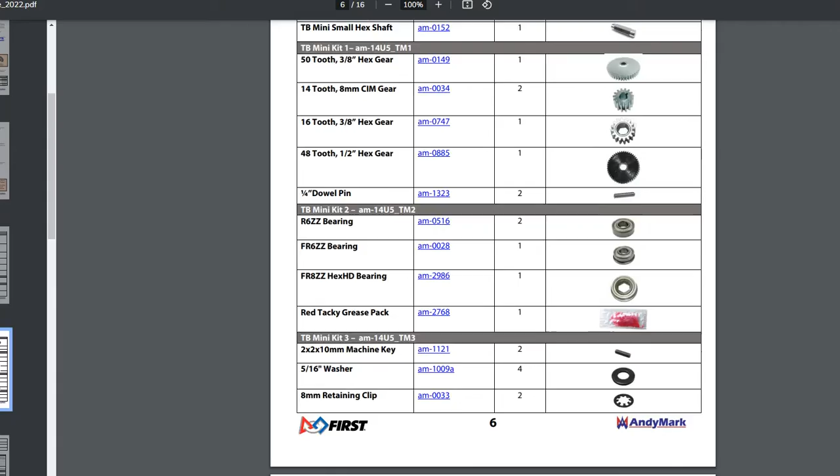A lot of these kits give you a nice layout of everything that's in the kit, quantities, sizes, and eventually CAD files, which are STEP files - we call them STEP for short - and then the drawings that go through it. What I did is I opened up this user guide in another tab, so we're going to switch over to that. This is the starting guide that everybody's going to have to read carefully as we build this.

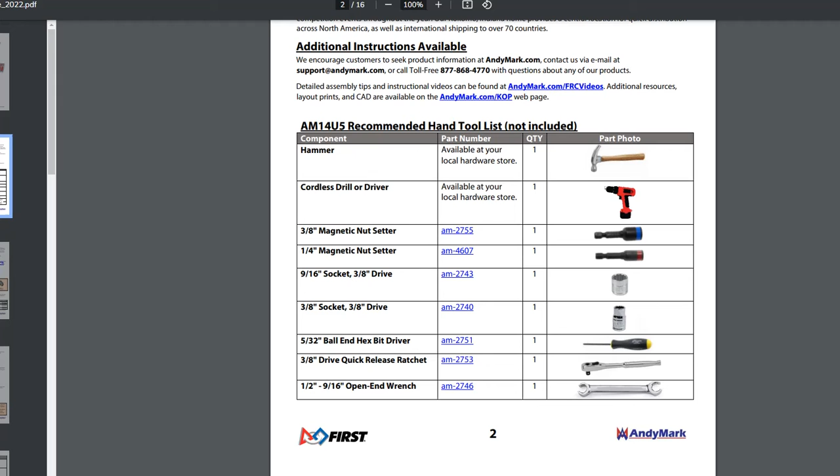It shouldn't really take very long. If you're really cooking and going through every step quickly, it's probably an hour or two to knock this one out. But since a lot of you have never done this before, most people will take a bit longer.

So the first thing to note is the gearbox in the kit is what they call the Toughbox Mini gearbox. This is a pretty standard kit - there's only like 3 gears in them and a hex shaft, and this mounts directly to the frame. Oh, we got another person coming in.

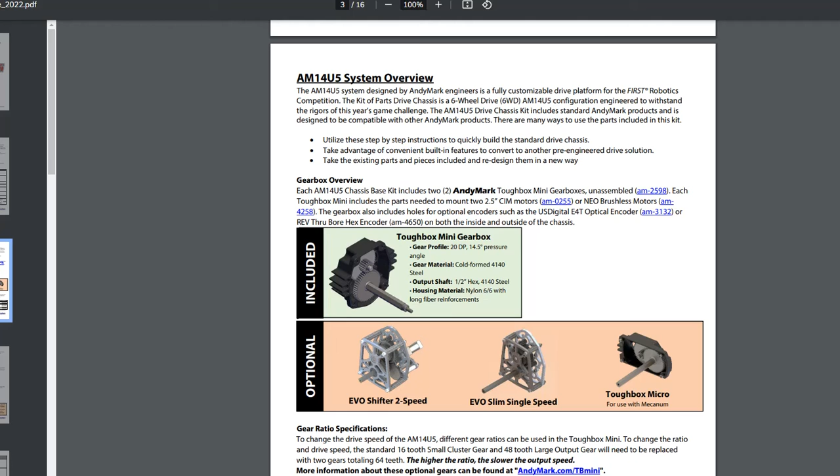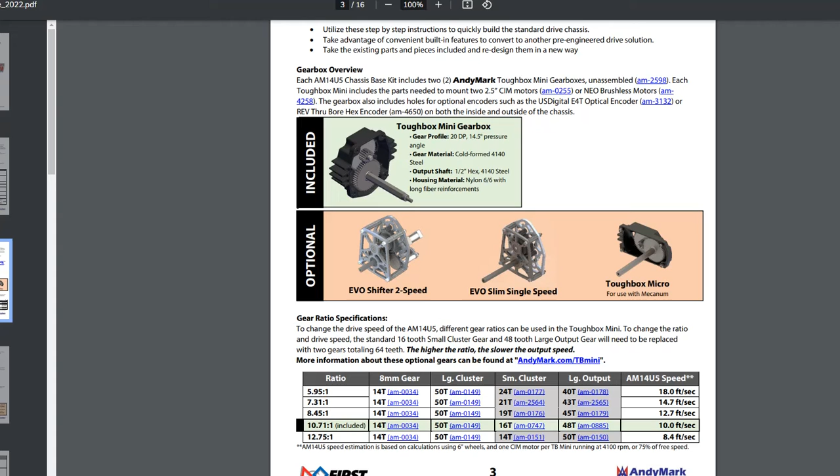Once you use this default gearbox, there are a few other optional gearboxes we could also use that have things like shifting, so 2-speed, and other smaller gearboxes, but a lot of these we don't have. You have to order them separately, but the standard kit is always going to come with the Toughbox Mini, so that's a pretty important setup.

Ratios are important because this tells you how fast things are going to go. The included ratio with this collection of gears, shown in green, is going to get the robot going close to 10 feet per second, assuming a 6-inch wheel. If you went to a 4-inch wheel, you're obviously going to go slower, and you might need a different setup. We do have a variety of gears that could give different configurations, but it's probably best to just do the standard kit ratio for now.

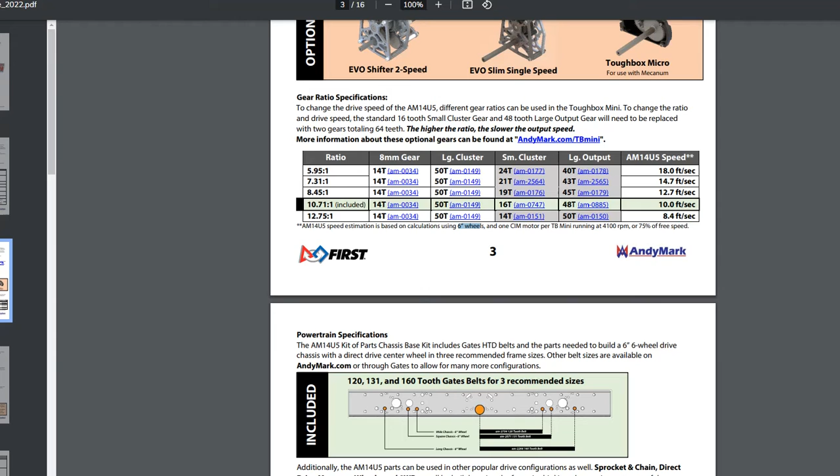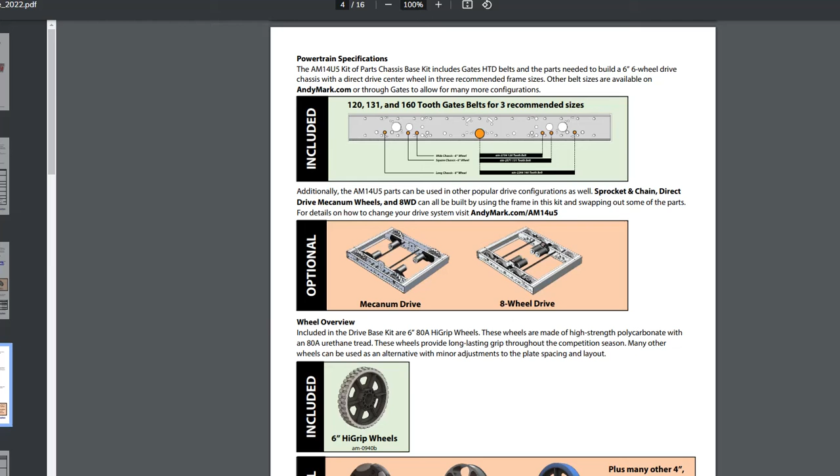Any other big items? These kit rails have a lot of different holes, and it can get real confusing when you start looking at what holes go where - where do I put the drive shaft? They're built for a lot of different configurations, and they'll show you a few different types. An 8-wheel drive configuration is pretty unusual for a kitbot, but it can handle it.

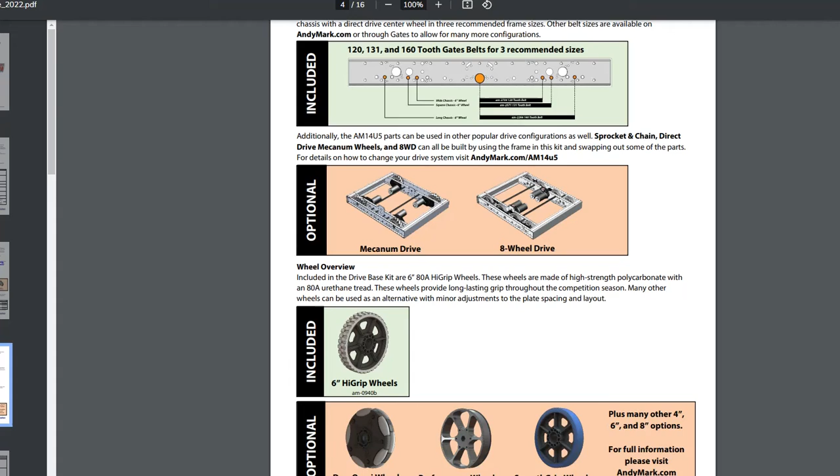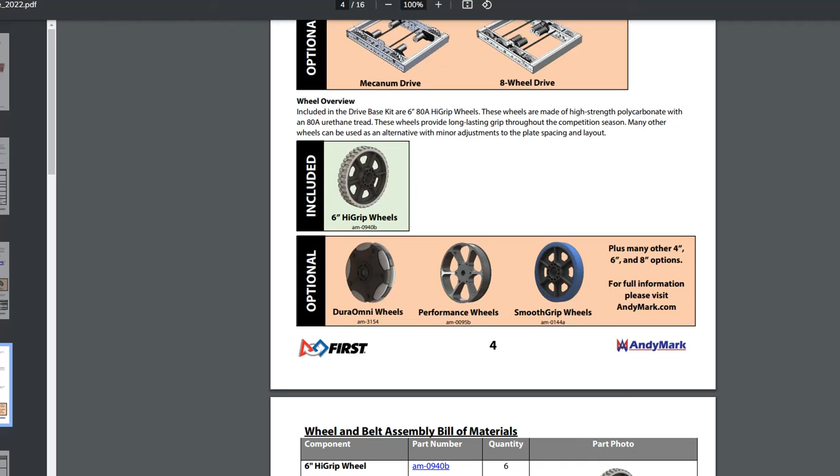The standard wheels that they include are these 6-inch HiGrip wheels, but there are also other types of wheels. We're probably not going to have a lot of these other types, but we do have other 6-inch wheels - it's going to be a little more complicated to see if we can get those to all fit.

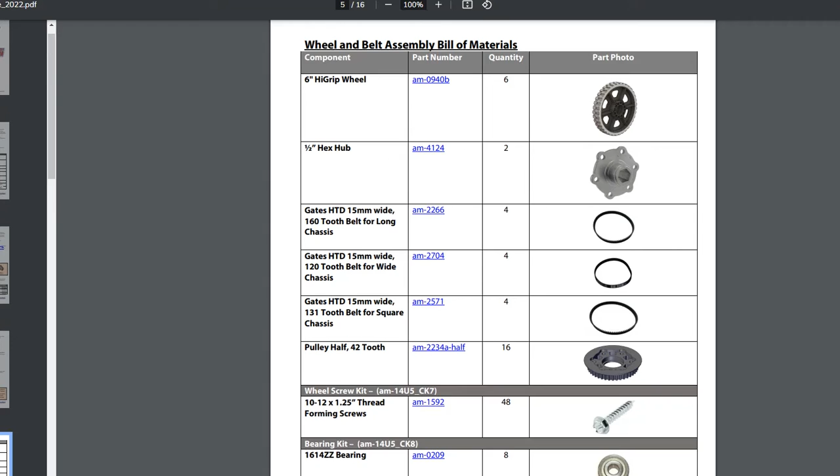From there we have what they call the Hex Hub. This forms a hexagonal shape in the shaft that engages into the wheel, and that's how it engages and turns the wheel. You basically press fit these into the wheels, and once you put them in there, they're a little difficult to get out, so you have to make sure you do it correctly the first time because it'll be hard to change.

Most of the drive kit of parts is going to use what they call belts, and that's what this Gates is, a brand name of belt, and it'll show you the different sizes. We have to be a little careful because we do have a variety of belts that are not necessarily the kit of part belts, but we should have a lot more of just the standard kit of part belts laying around ready to use.

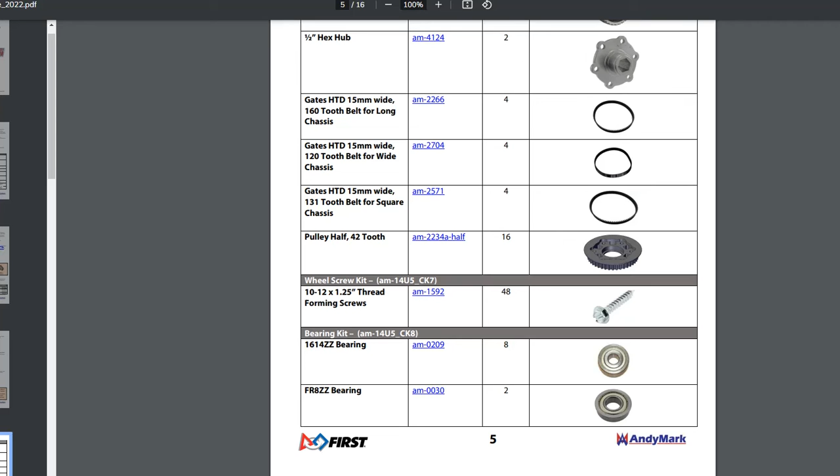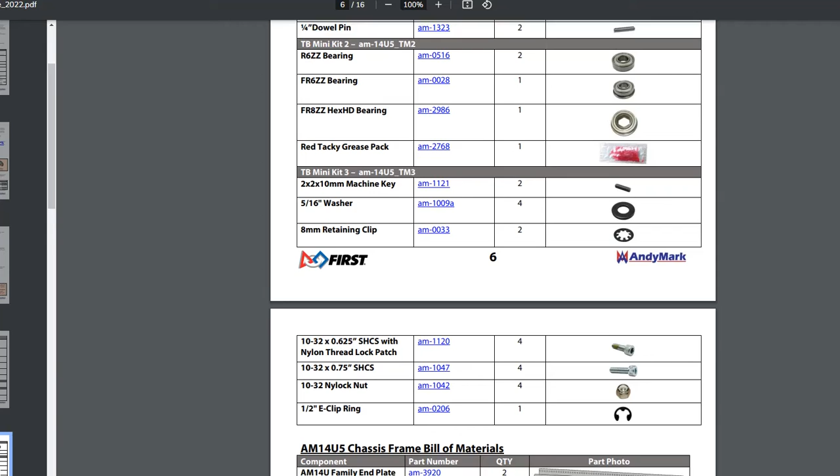So those are the common components that you see from the kit of parts. The rest are going to be smaller things that are going to be inside the gearboxes, and screws, drive rails.

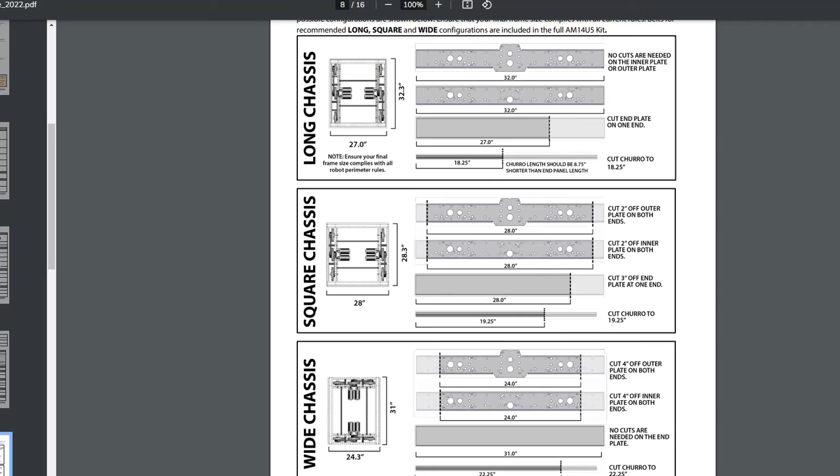This is an important step we're going to have to really decide on. We talked a little about this on Saturday, but there are 3 different configurations they call long, square, and wide. We're probably not going to use a wide configuration in this game. There's a little debate between a square and a long configuration.

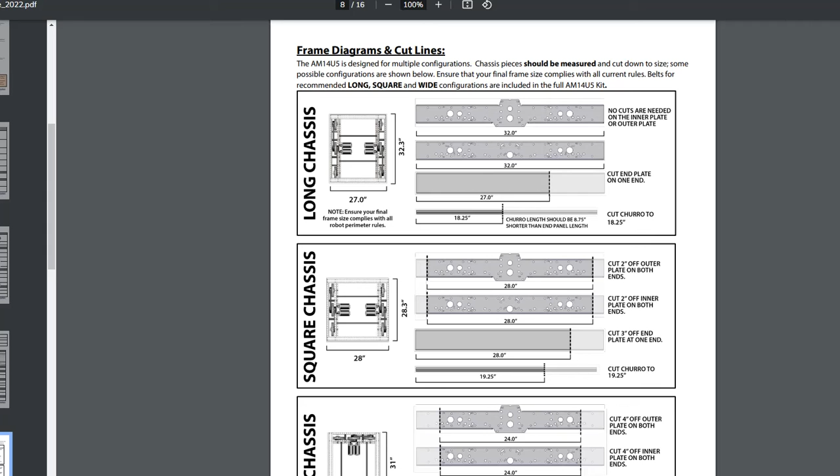Once we make the cuts to these, it's hard to go backwards. So a lot of what we're going to do in the next few days is try not to cut unless we're absolutely certain we're going to cut a certain configuration. We can just keep building and building and eventually get to the cut area.

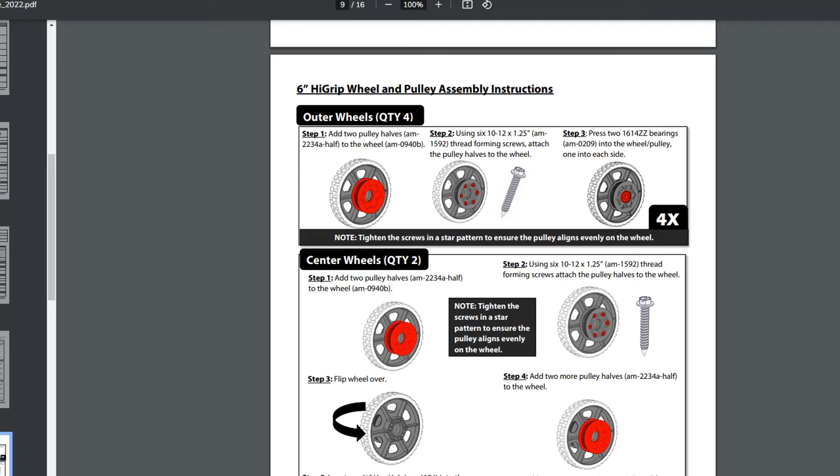Here it's going to go through the process of how you put the wheels together, and I'm certain we have a number of wheels already built. The trick with a lot of stuff that's already built is making sure it was built correctly, so looking at this diagram, looking at whatever wheel was built, and not assuming it was just done the right way.

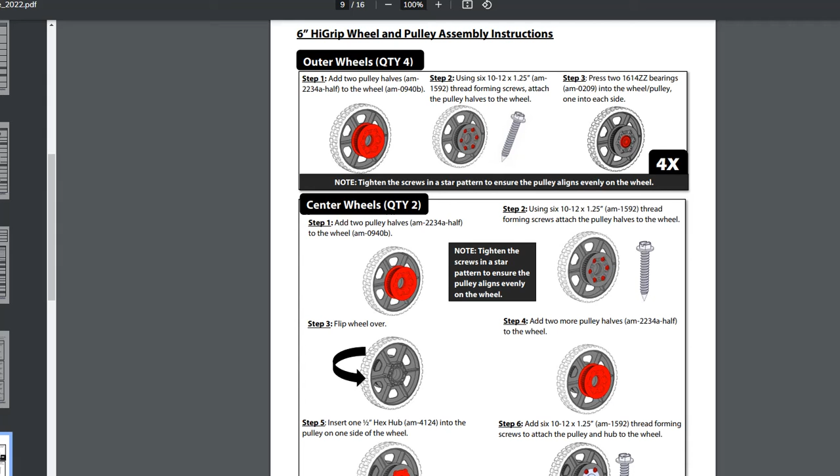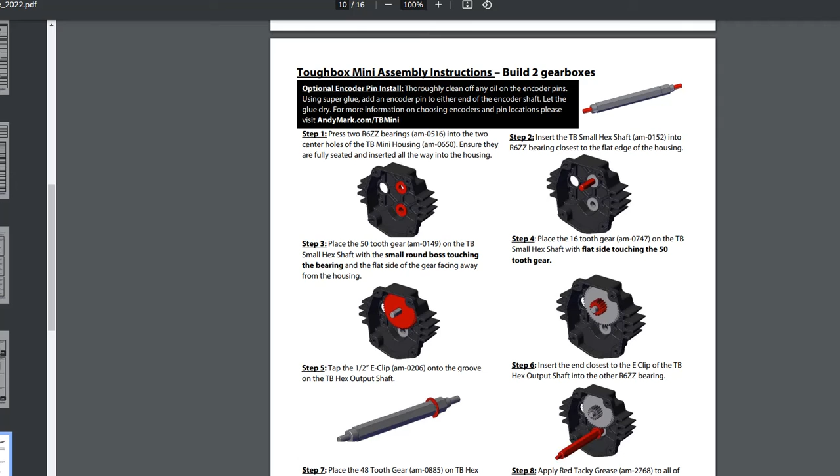That's an important part of this, to look at these types of wheels and see how they were done. At this point we should have 6 wheels, I think, is mostly what we're focused on. I don't know if we're totally set on 8, but 6 for sure, and that should be done correctly.

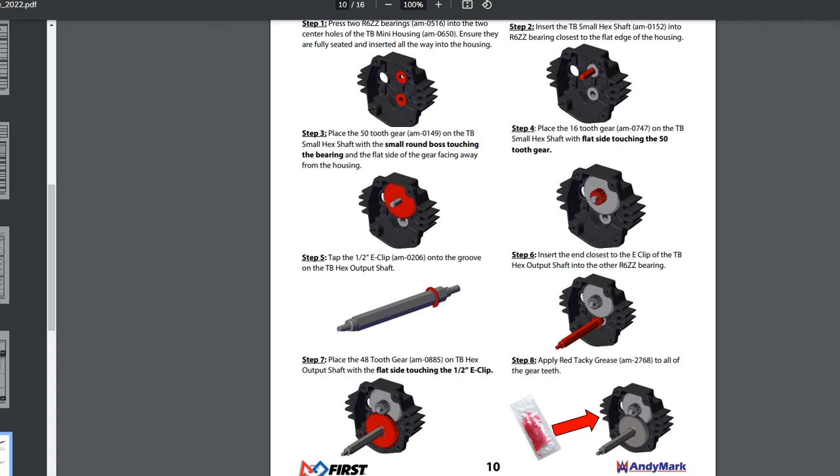And then the same with the gearboxes. Gearboxes, if they're not done well, you can hear it pretty quickly when you spin them, they won't sound right. Or if they don't have the proper grease, that's going to be a little harder to see sometimes, but you could see some grease kind of oozing out of these gearboxes. Sometimes you can have too much grease.

So a lot of different ways the gearboxes can be done, so we just have to be cautious as we pull out some of these older components, older gearboxes that were already done.

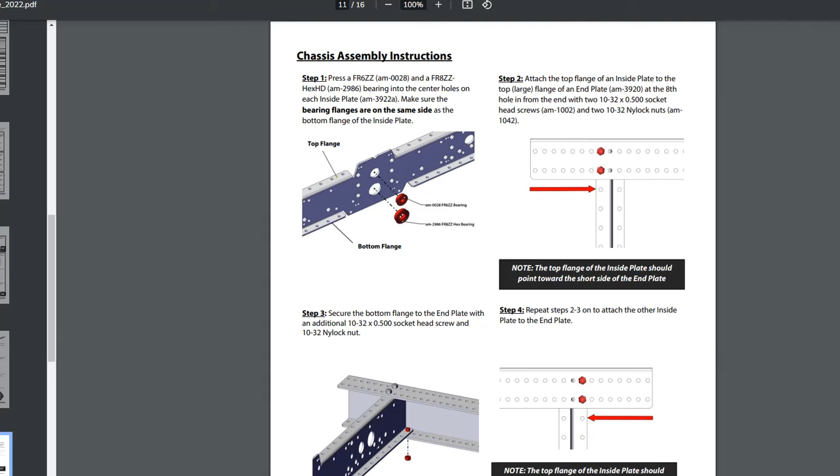Getting the chassis square is a little bit of a trick, and this is kind of talking about how you assemble the bolts. You can make it into more of a parallelogram if you're not careful, and the robot's not going to be quite a well-driving machine. So these are things to keep in mind as we're putting together the frame of the drivetrain.

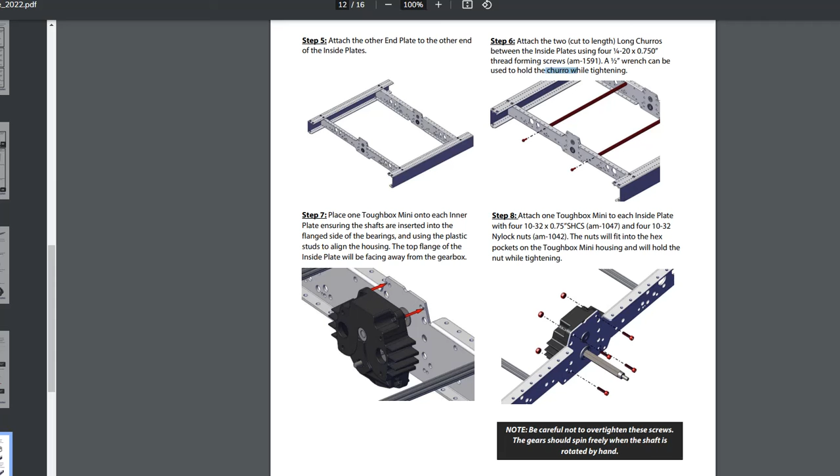Here it's showing the cross bracing that goes between. We use these things called Churro Tubes, and I think it actually uses the word churro, but they kind of look like the food churro that you might eat. They're pretty much just a giant spacer that you can put a screw on the end, and it'll be a way to brace the frame in this aspect. We can also use other things besides the Churro Tubes if we want additional bracing.

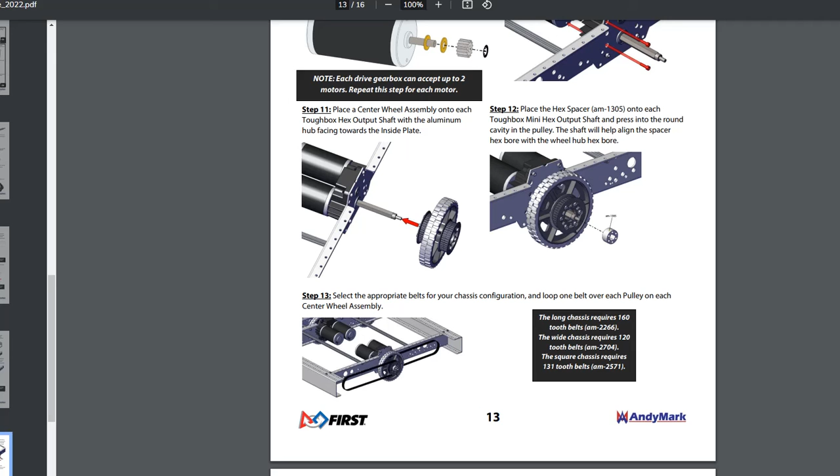And then from there, we assemble the gearboxes onto the rails. You put one wheel through the hex shaft on the gearbox, and then put things like the bearings and the shaft collars. In this format they have a CAD of the belts, but obviously the belts will have to be tensioned and pulled out just right so they fit, but that's kind of the idea of how you would pull them out and eventually slide in the other wheels.

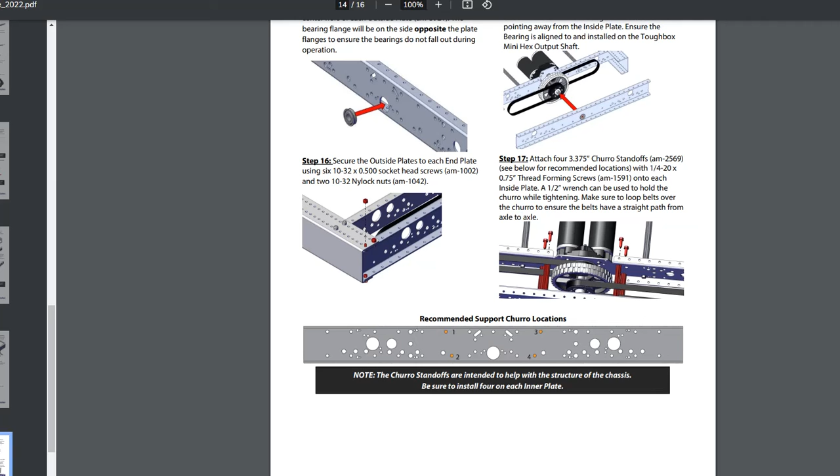Getting all the different locations can be a trick, but if we follow this guide and think about it as we're going through it, it shouldn't be too complicated to do.

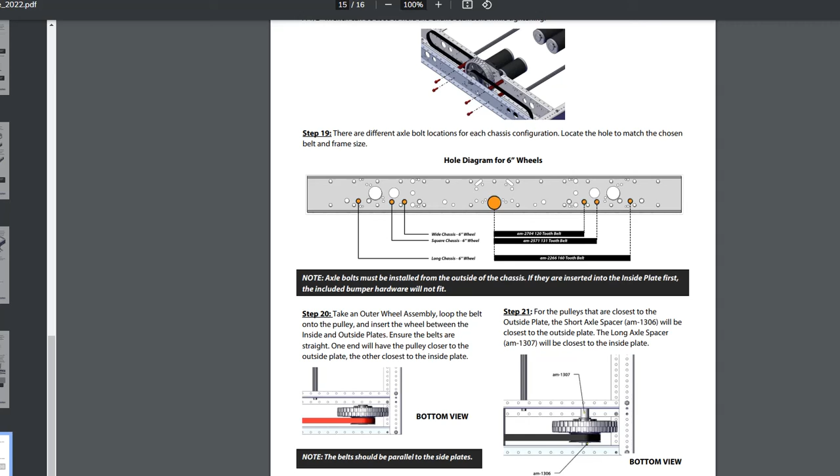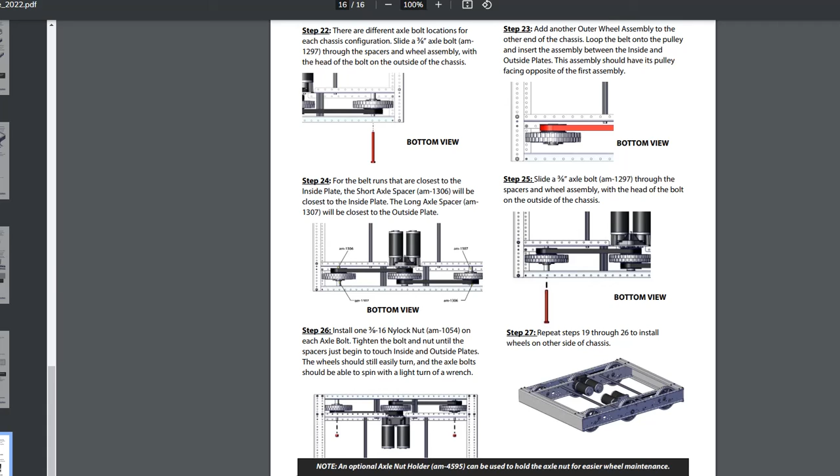From there, we'll have all the different other wheels that we'll put in until we get to the full 6-wheel configuration with belts. The drivetrain will go through the gearboxes on the center, go to the center wheel, and the belts will go out to each wheel on the outer side. So all the wheels will be connected together through belts, we will not have any open wheels.